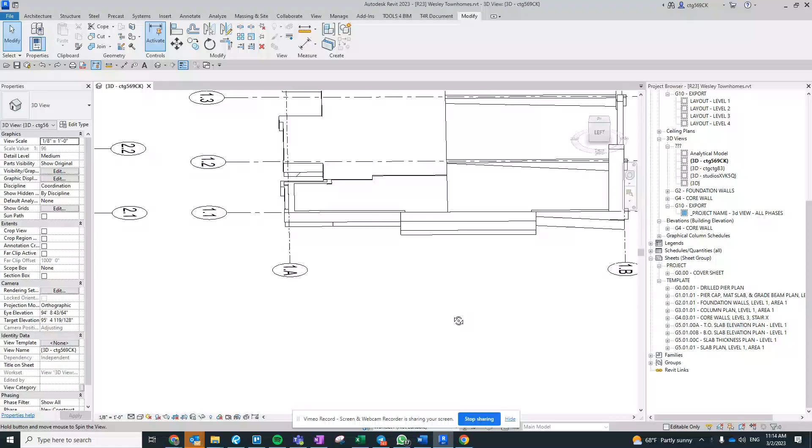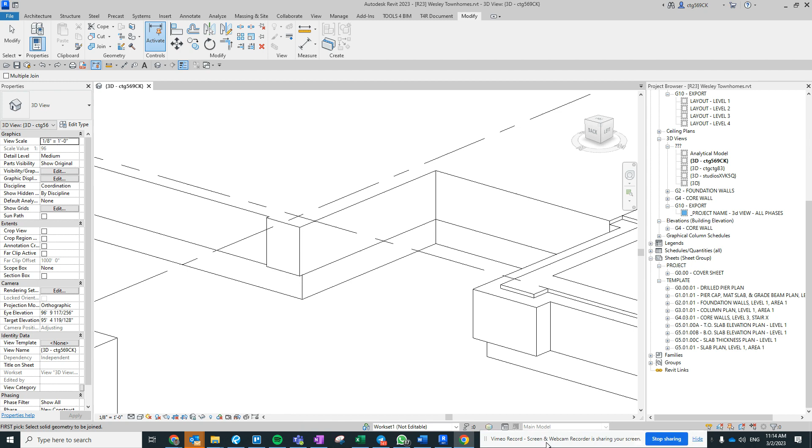So next up, let's take a look at thickened slab edges on these sloping slabs. First things first, though, we do have these two different types of thickened slab edges here, and what we can actually do is clean it up and join them together. That's something I did not do in the last video. Let's move this out of the way so we get our full screen.

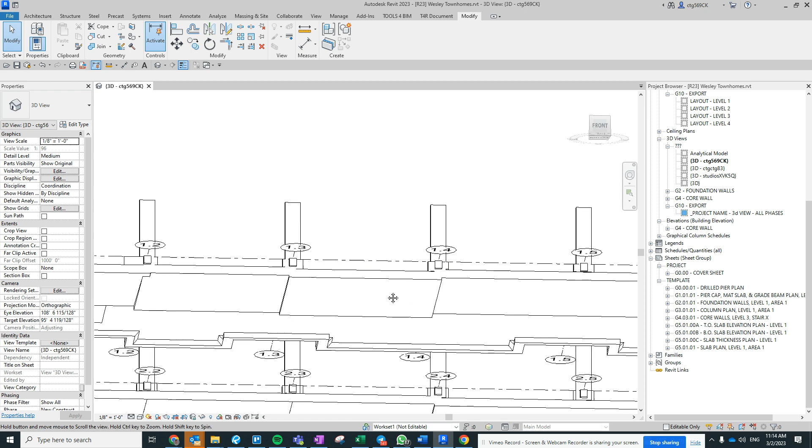With these thickened slab edges, we have to remember that we're only doing them around the outside edge, because at the inside edge we want that wider one with the thickened part on both the left and right sides, rather than a flat face on one. So the problem is that if we want to do a thickened slab edge, we can do one here, but we can't do one here. It won't apply it, because the floor is already sloping.

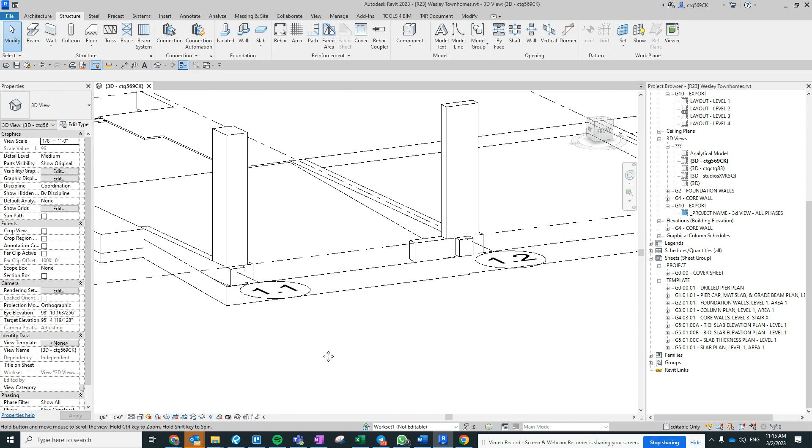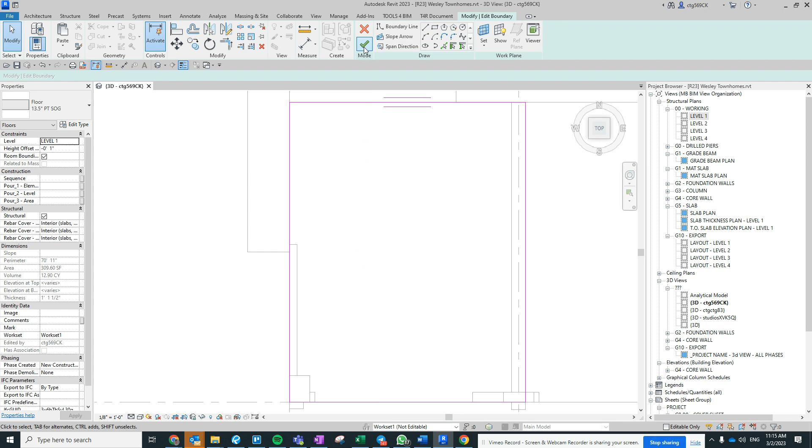But one of the things we did find out is that we can go in here, take this, and look at it from the top. I'm going to cut this out, delete it, don't attach. Actually, before we do that, let's make sure we got the information: negative 1 foot 0 and 3/4. I'm going to do Control X, and we'll see if we can paste it back in when we come back to this one.

So now this slab edge is flat, right? And what's great is now we can come in and apply this slab edge here, thickened slab edge here, if it wants to work.

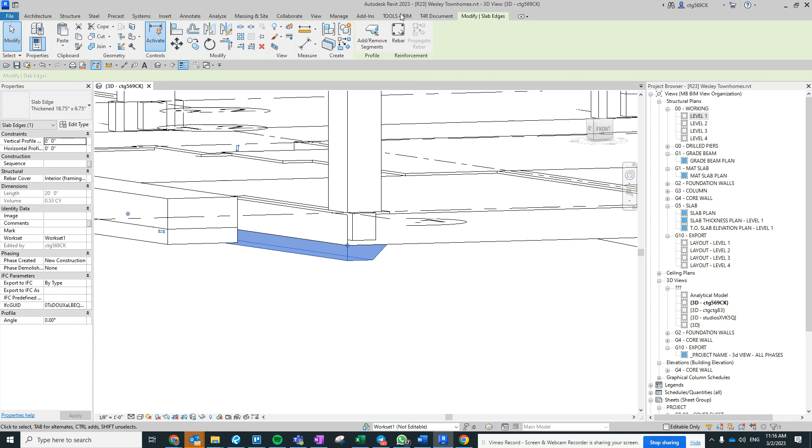Sometimes my computer decides it wants to stop working. We just give it some time. There we go. And then we can come in and add another segment there. Now we can add those things in. Let's make sure that this slab edge here is in the right place.

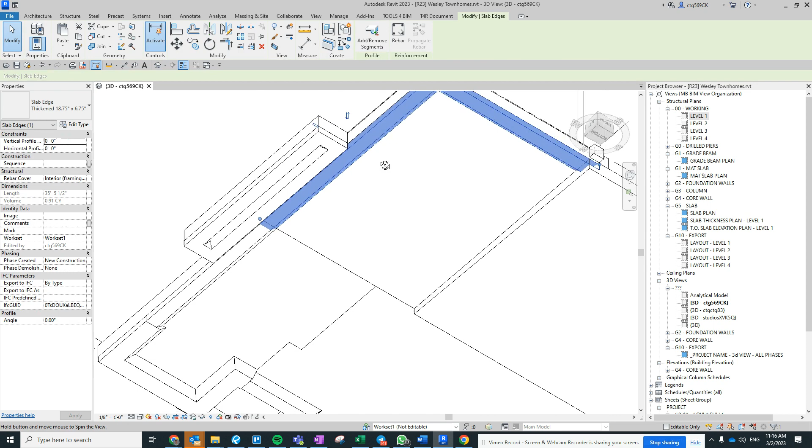Maybe the internet's slow. Looks like that's in the right place. Now what's cool is we can come back in here and see if we can paste this back into the same spot. Paste to same place. There we go. And voila, we have a thickened slab edge.

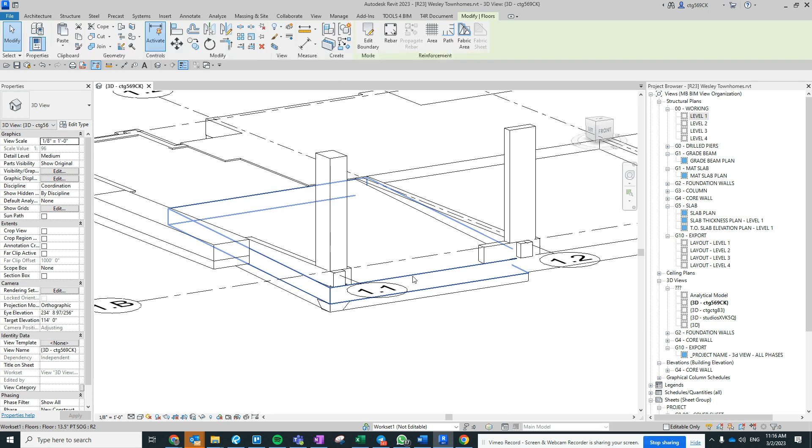Or we have a sloping slab where we've got these thickened slabs coming along here. Now it doesn't work perfectly at this joint, but that's okay. This is good enough for what we're trying to do at the moment.

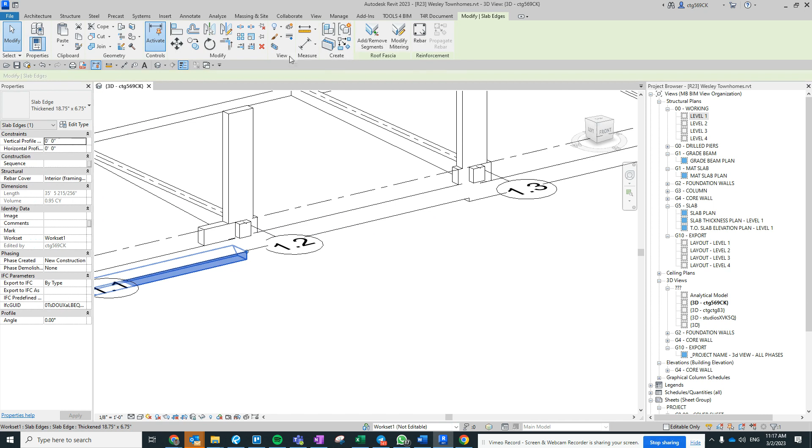Now, since these other slabs don't have a sloping edge that we care about, we can come in and create similar ones here. Let's make sure that we don't overlap, so we want to pull these back a little bit, create a similar one here, and then we will create a similar one.

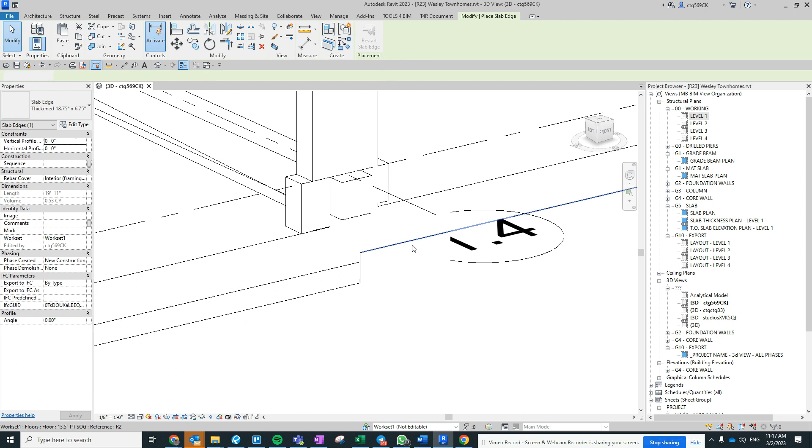That didn't work for some reason. Create a similar one there. Great. And then we're going to go back through and do the same thing on this one, since it's got these edges along this side that we care about.

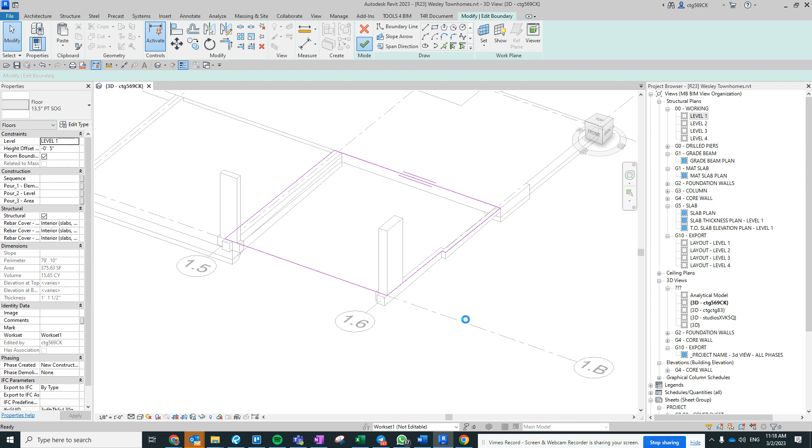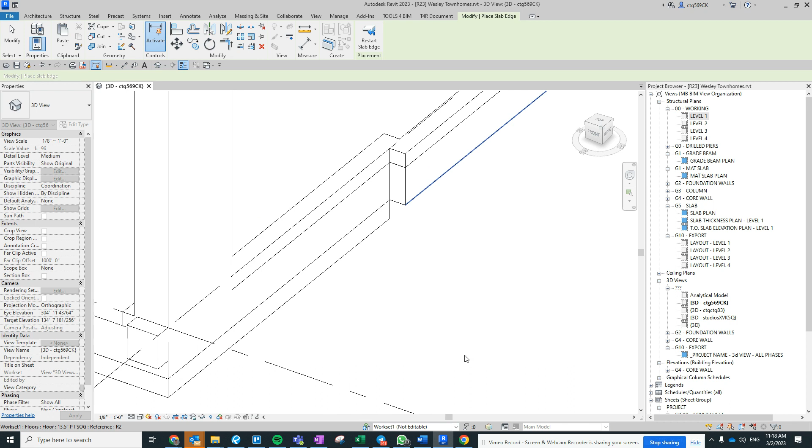So I think what we can do is just Control X, hopefully it doesn't destroy anything. Detach. And then we'll come in and create similar ones here, here, and here. And now, go back in, paste to same place. There we go.

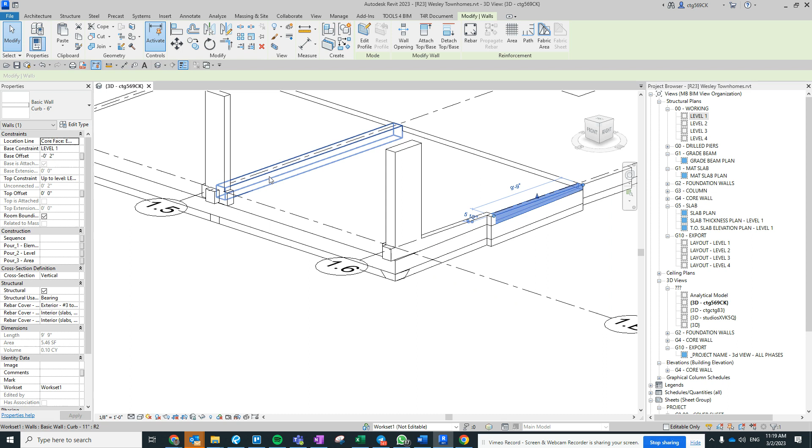And wouldn't you know it, these things come back in. So we also want to make sure that our walls here, our curbs, are still attaching to what we want them to attach to. It looks like this one may have lost its attachment.

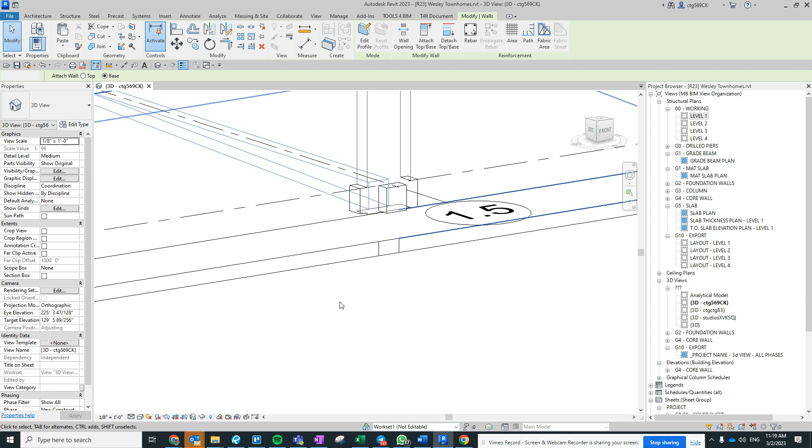Okay, that one looks correct now. Let's make sure to pull this back. And let's check this other one as well. These ones still, are they still good? It looks like they're still good there.

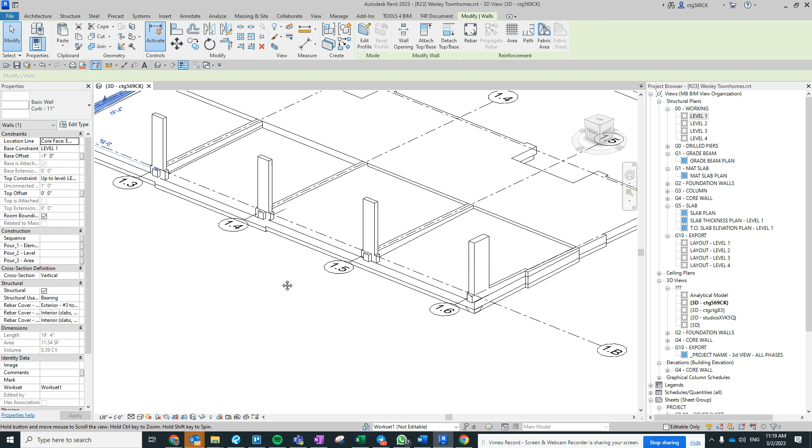Okay, so now we've gone through and added thickened slabs on these sloping slabs, or at least the thickened exterior slabs. Now we're going to go through and worry about the thickened slabs on the interior of the building, which is a whole different animal for us.